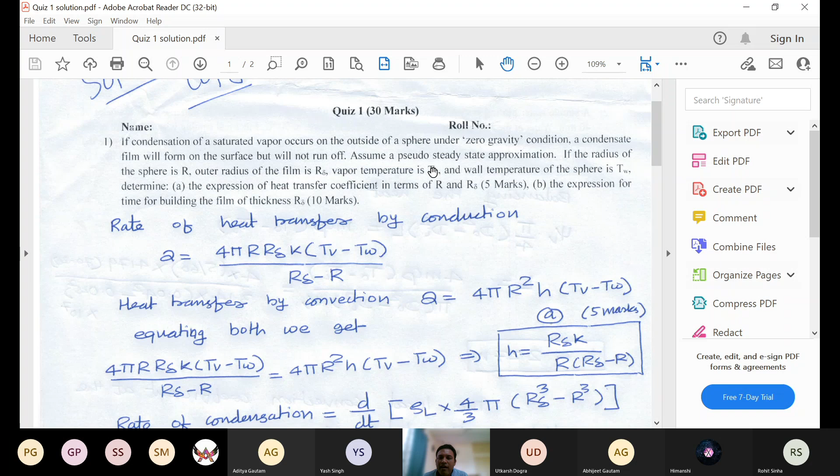Okay, so this was the first question. As I said, the tutorial which we have done, instead of a sphere as given here, the cylinder was given, and that's why L was coming in somewhere, isn't it? But in case of a sphere, there is no L, no length, isn't it? So many people missed that point and just copied the solution of the cylinder as it is without thinking. Please try to go through all the tutorials carefully.

I thought that since these are based on the tutorials, you would find it easy. All right, so what was the first part? First part was we wanted to find out the heat transfer coefficient, isn't it? So for that, we compared the rate of heat transfer obtained using conduction. For conduction, the rate of heat transfer can be directly written like this. This is the same conduction equation we derived for the spherical geometry, isn't it? So that can be given as 4 pi r into r delta k, tv minus tw, divided by r delta minus r, and this we can equate to...

the heat transfer obtained using convection, isn't it? For convection, you can write the equation as HA delta T, isn't it? So A will be for the sphere, 4 pi r square, H into delta T will be TV minus TW. And if you compare these two, what you get is H equals R delta K divided by R into R delta minus R.

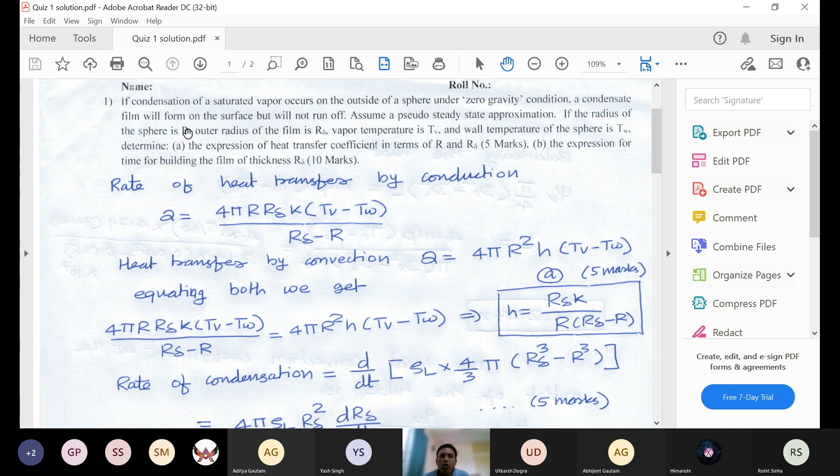That was straightforward. The second part was to find the expression for time t to build the film of thickness R delta. So the rate of condensation can be obtained as d/dt of density of the liquid multiplied by the volume. The volume will be given by 4/3 pi times (R delta cube minus R cube). Many people used R delta square and R square with L multiplied here, which is the equation for cylindrical geometry, not for spherical geometry, isn't it?

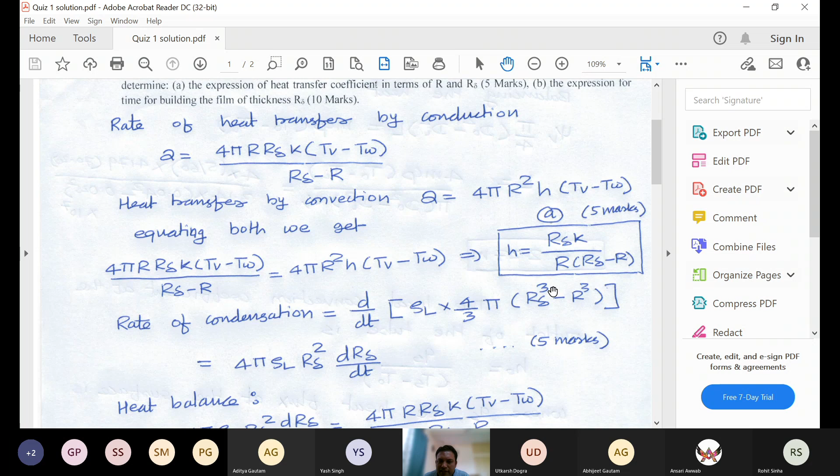So if you differentiate this entire thing, what you get is 4 pi rho L R delta square dr delta by dt, and this is the rate of condensation. But you wanted to find out how much energy will be used for this, isn't it? So you need to multiply this by latent heat of vaporization, LV. Some students have missed this LV multiplication here. So if you multiply LV to this, that will be the rate of heat transfer.

And this rate of heat transfer should be given as rate of heat transfer by conduction. So if you compare these two and rearrange all the terms, you get this integral R delta minus R delta square dr delta by R delta. And if you do the integration, you get T is given as R delta cube by 3 minus R into R delta square by 2 plus R cube by 6, multiplied by LV rho L divided by R K.

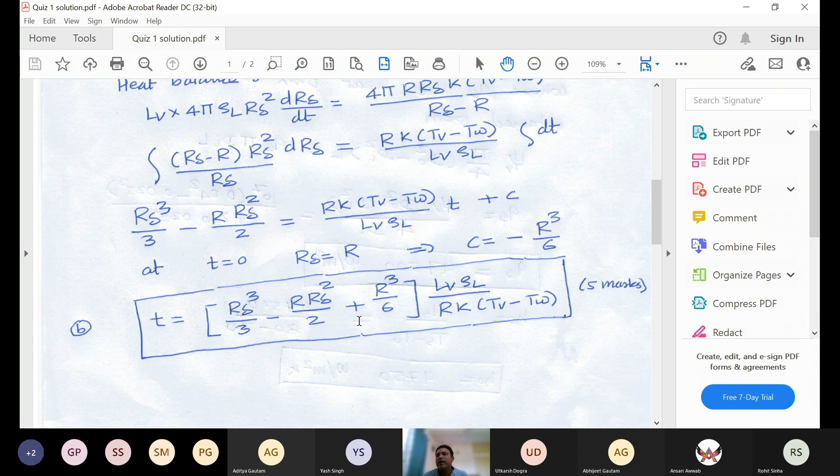TV minus TW, okay, just one step answer, two steps answer, isn't it? It was not difficult, and a similar question was done in the tutorial. So I was expecting many of you to do it correctly. But unfortunately, only few students could do it correctly. So that's not a good sign that students are not going through the tutorials.

Okay, second question. Second question was again very easy, because what is given is: we had a thick walled tube, isn't it? And the thick wall of the tube itself has the electrical current passing through, and that was leading to the dissipation and the generation of heat.

So the amount of heat generated will be given by psi v into pi by 4, basically the volume of this tube, isn't it? So that will be given by D naught square minus di square, L into pi by 4, and this volume multiplied by psi v will give you the amount of heat generated. So this amount of heat generated should be equal to mCp dt, isn't it? So if you compare that, you can directly obtain the L value.

That comes out to be 2.27 meter. Some students have only used pi by 4 d naught square or di square. They have not taken the difference. Remember, the heat is generated only in the thick wall of the pipe, isn't it? So that means you need to find out the volume of that particular thing, and not just the internal diameter or the outer diameter.

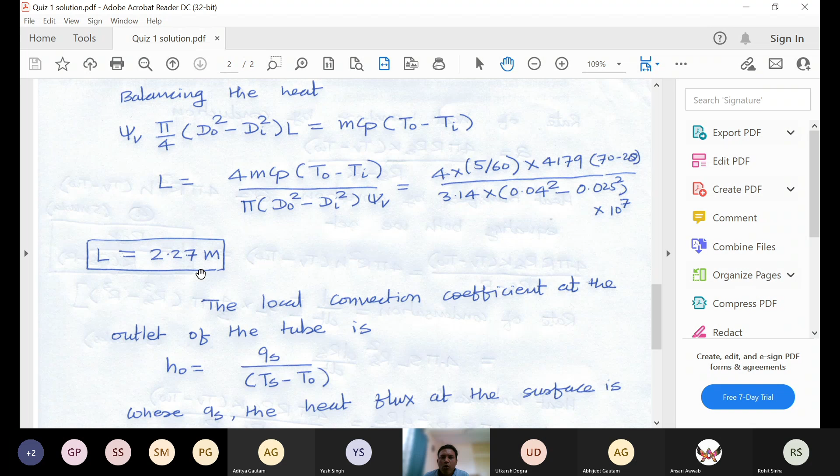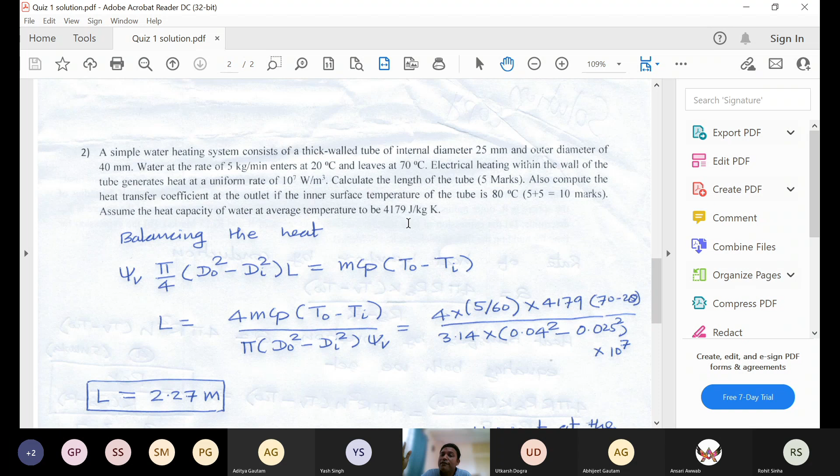Okay, so from this you can obtain L directly. Now what was the question? Question was asking to compute the heat transfer coefficient at the outlet of the inner surface. Inner surface is clearly mentioned. When it is mentioned clearly, the inner surface mentioned means what? You don't need to calculate the overall heat transfer coefficient. You need to calculate the local heat transfer coefficient, isn't it?

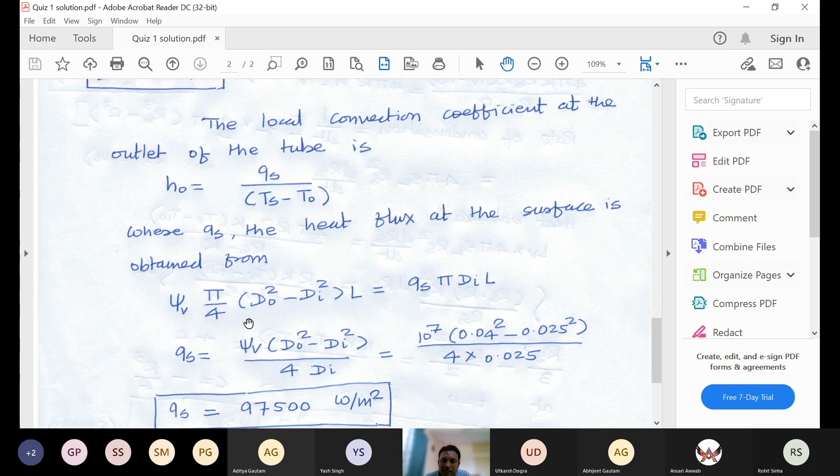So this local heat transfer coefficient will be given by H naught equals Qs divided by Ts minus T naught, isn't it? The wall heat flux Qs will be given by H naught times Ts minus T naught, where T naught is the temperature at the outlet and Ts is the surface temperature. So Qs multiplied by area will give you the total heat transfer, and that total heat transfer you can equate to the actual total heat transfer. So you can use H naught Ts minus T naught into this area as same as the amount of heat transfer, and you can calculate H naught.

H naught comes around 9750. Many people have used the LMTD here. In the question, it is clearly mentioned that the heat transfer coefficient at the outlet of the inner surface, so that is not the capital U. It is just the H at the outlet that is being asked in the question.

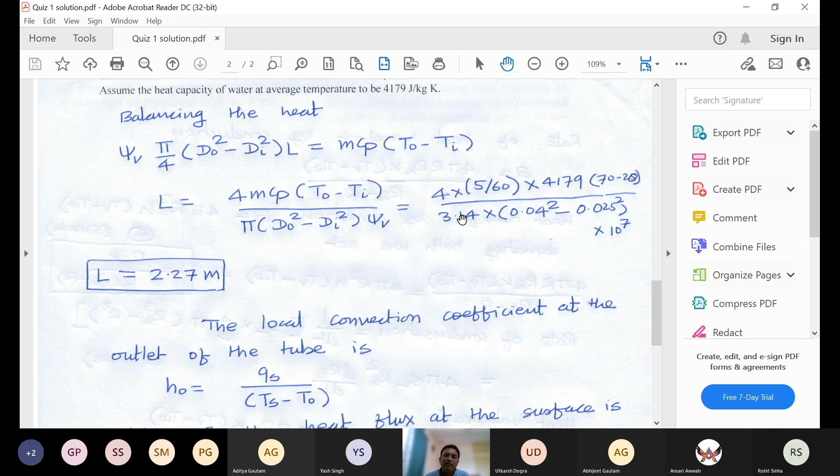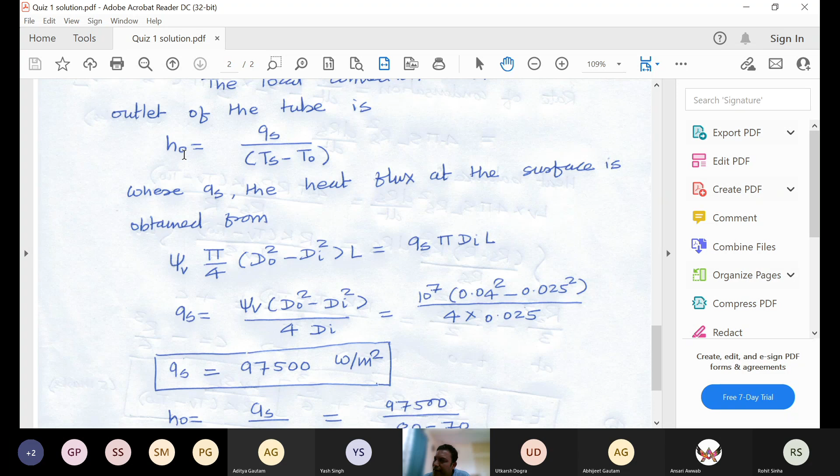Okay, so again this was straightforward, even though I have shown two steps here, it could have been done in a single step. This total amount of heat transfer here should be given as H naught, Ts minus T naught, into pi Di L. That's it. Why Di L? Because inner surface is mentioned, that's why inner surface area has to be multiplied, isn't it? And you can calculate this H naught directly. This H naught is given for the outlet. You could have calculated directly H naught as this. Is it clear to everyone?

So both the questions were extremely simple. I have specifically designed them as simple so that many of you, since you are coming for the first time for an offline quiz, you should get some help.

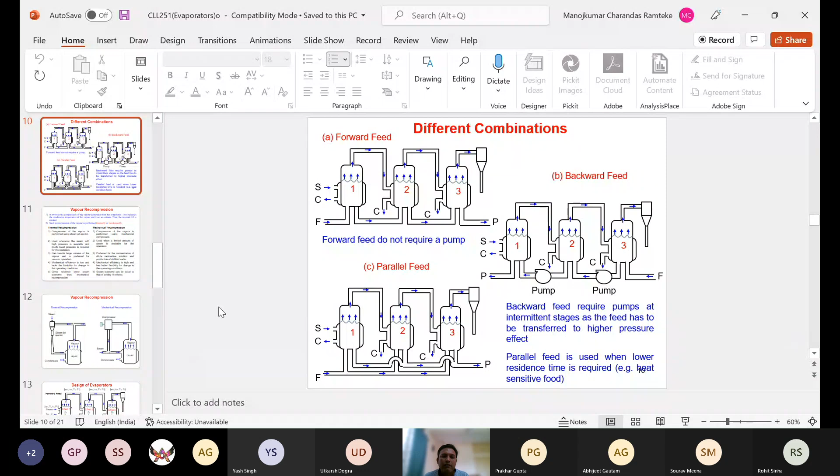Yes, sir. Okay, so remember how we started our journey in this course. We started with the concept of 3 modes of heat transfer, then conduction, then convection. In convection, we looked at heat transfer coefficient, forced convection, and natural convection. After that we looked at condensation and boiling, then radiation, and after that heat transfer equipments.

The last bit remaining in this course is evaporation. Why evaporation? Because you are all process engineers. If you were a mechanical engineer, you wouldn't have done this evaporation, boiling, and condensation. But for a process engineer, evaporation is extremely important, because if you are working in a process industry, this is what you are going to do.

Evaporation is commonly used in the food processing industry. You see several products like tomato ketchup, chocolate production, beverages, different liquid beverages, production of salt, sugar, etc., even milk products. In all these process applications you will see evaporation, which is extremely important. Being a process engineer, a chemical or biochemical engineer, you will mostly be looking at this type of operation in the industry. That is why evaporation is extremely important.

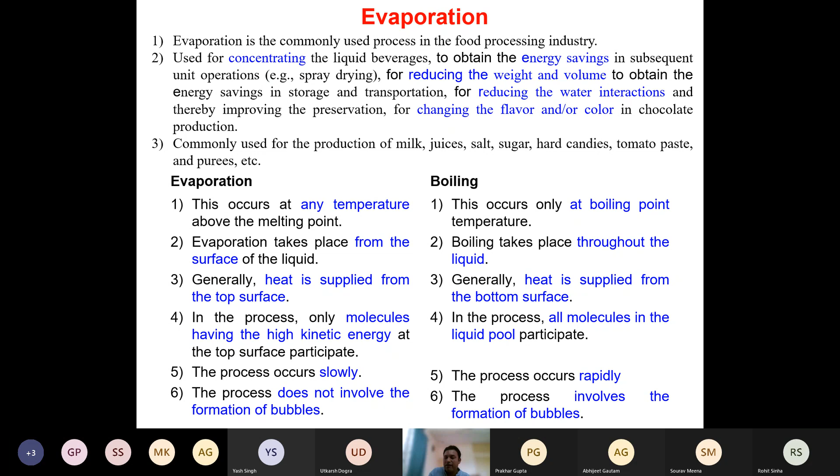Another concept you already know: what is vapor pressure? Typically, if you look at a liquid, you will see that the molecules present at the top surface are bounded only by the layer of molecules at the bottom. There is no bound at the top, these molecules are not bounded at the top.

But if you look at the other liquid molecules present inside the liquid, these are bounded by a top layer as well as a bottom layer, both. You can see that the molecules at the top layer, at the surface of the liquid, are moving in a zigzag manner because of their kinetic energy. At some time their kinetic energy overcomes the energy barrier required, and because of that these molecules escape from the liquid surface. That's what happens in evaporation.

Since these molecules keep on escaping from the top surface, eventually they build a pressure in the vapor space, and this vapor pressure in the vapor space acts on the liquid surface itself. This pressure is called vapor pressure. So the back pressure exerted by the vapor on the liquid surface is called vapor pressure.

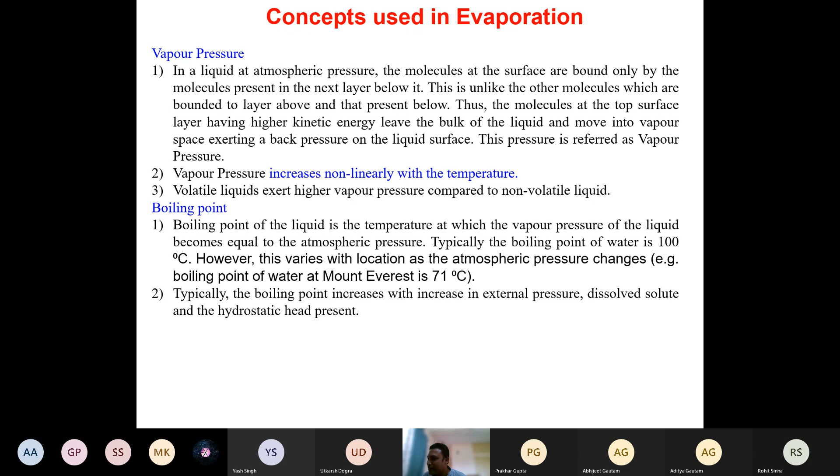How does it decrease with vacuum? What is the boiling point of water at Mount Everest? It's 71 degrees Celsius. Why not 100? Because the pressure at Mount Everest is low, isn't it? So if you lower the pressure and create a vacuum, the boiling point will decrease further. That decrease in boiling point leads to an increase in the difference between TS minus TB. Correct? So your driving force increases by creating a vacuum.

Again, separators are required because whatever vapor comes out from the evaporator needs to be condensed, and this condensed liquid has to be separated from the non-condensing gas. So a separator is used. Is it clear to everyone, at least whatever required equipment is there? We will see the pictorial representation of the evaporator that will clear the concepts further. But is it clear whatever we are saying so far?

Yes, sir. Okay, so these are the different types of evaporators. Let's look at the first one, the batch type evaporator. In the batch type evaporator, there is a liquid pool that we are trying to concentrate. The higher the temperature of this liquid, the higher the vapor formation, and therefore the faster the concentration process. Do you agree?

If I increase the temperature of this liquid present here in the pool, higher will be the vapor formation, isn't it? Evaporation increases with the increase in the temperature of the liquid. Do you agree with me? Yes, sir.

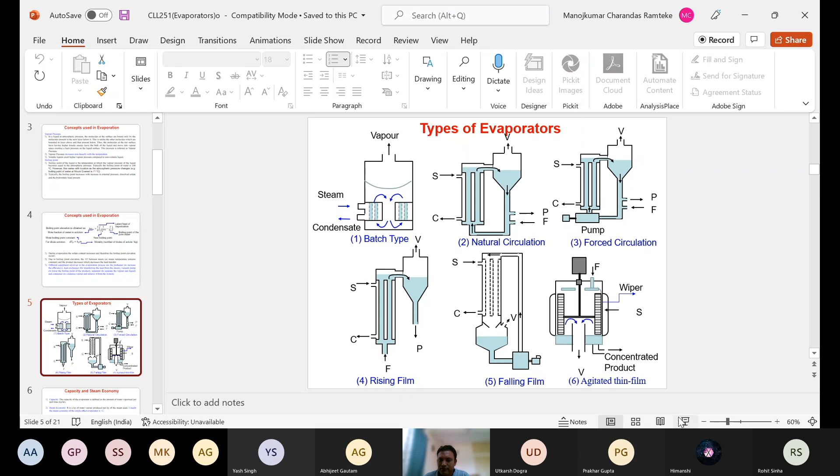So this agitated thin film is done. Now let's define some of the terms in the evaporator. First important term is the capacity. Capacity of the evaporator is defined as the amount of water vaporized per unit time in the evaporator.

There is another interesting term which is called steam economy. Remember, as I said, in the evaporation process you supply heat using steam, isn't it? And because of that the vapor gets formed over the liquid or solution, isn't it? So the amount of water vapor produced, typically the solution involves water, per kg of steam used is called steam economy. Is it clear? This is a very interesting term.

Both these terms are very important. Capacity is the amount of water vaporized per hour, per unit time. But amount of water vaporized per kg of steam used is steam economy. The kg of water vaporized per kg of steam used is called steam economy. Usually the steam economy of a single effect evaporator is less than 1, or approaching 1. Is it clear?

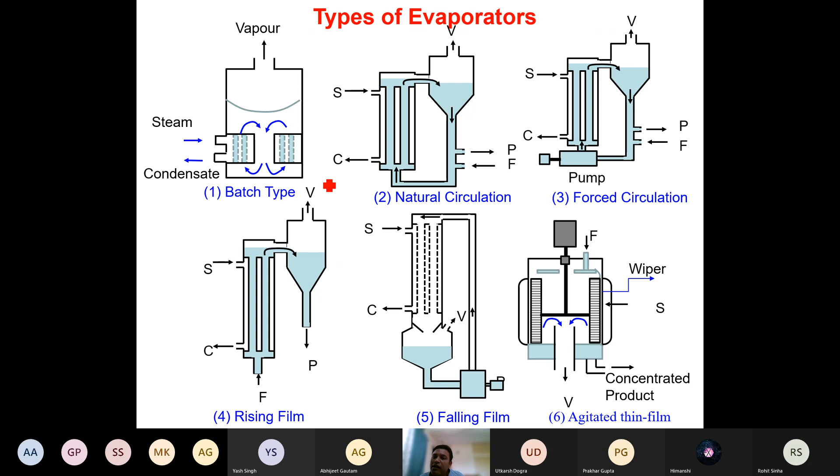But the most commonly used way for increasing steam economy is by using the multiple effect evaporator. Here we have used only one evaporator, but let's say if I use such evaporators in series - I use this natural circulation evaporator in series, so one unit is this. Again, the product coming out from this is used as feed to the next evaporator, and the product coming from that is used as feed to the third one. So multiple such concatenated individual units can be used in multiple effect evaporators. Is it clear to everyone what I'm trying to say?

Is it clear? Yes, sir. So by using multiple effect evaporators, we can improve the steam economy significantly. It can go beyond one, it can easily go beyond one.

The other methodology for improving steam economy is vapor recompression, and this is very important. What does vapor recompression do? Whatever vapor comes out from one effect is compressed using a compressor. Once you compress the vapor, what happens to it? When you compress the vapor, its boiling point increases and its enthalpy increases. This compressed vapor then acts as steam to the next effect.

So vapor recompression is a very important methodology for improving steam economy. Why? Because this is the method used in nuclear reactors. If some of you join the DAE, Department of Atomic Energy, this is what you will use there. The rationale behind using vapor recompression is that it does not increase the volume of the fluid used - that is a very important statement. Why? Because in a nuclear reactor, whatever solvents you use usually have radioactive material. If you increase the volume of this radioactive material, you will require additional money to discard it.

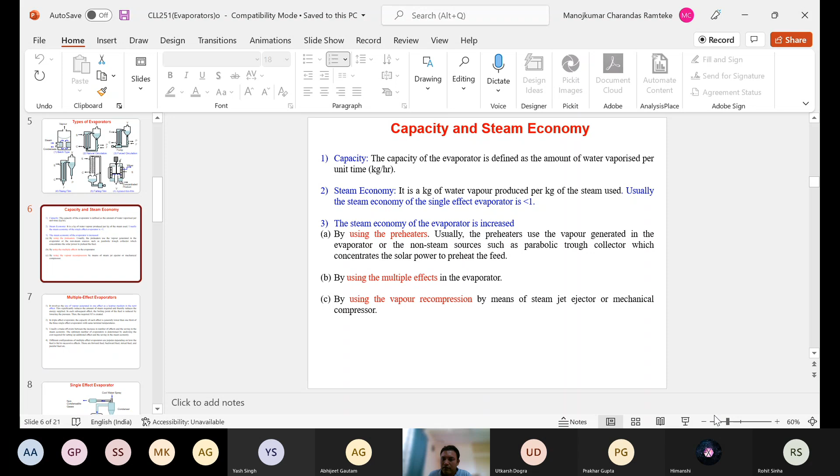So let's look at each of these in a little bit more detail so that you will appreciate what I'm trying to say. Is my slides visible or I lost you? Visible. Okay.

So one of the commonly used methods for improving the steam economy. What is steam economy? The kg of vapor produced per kg of steam used - that can go beyond one by using multiple effect evaporator or by using vapor recompression. So let's look at multiple effect evaporator first and then we will look at vapor recompression. Both these methods are extremely popular in the industry.

In fact, one of the lab experiments is on multiple effect evaporator. So 3 effect evaporator you will be looking at in your CLP 303 or 305 in the next semester, so that you will practically see in the lab. So in multiple effect evaporator, what we do is use multiple single effect evaporators one after another in a series to improve the steam economy.

So it involves the use of vapor generated in one effect as a heating medium in the next effect. That is what I said, isn't it? So vapor generated in the first effect is used as steam for the next effect, and this vapor generated in the next effect is used as steam for the further downstream effect.

This significantly reduces the amount of steam, because now you are using steam only in the first effect. You are not using steam in the second or third effect. In the second and third effect, the vapor generated from the previous effect is used as steam. So no additional steam is used in the second and third effects, and because of that, the amount of steam consumed decreases significantly compared to the amount of water evaporated. Is it clear to everyone?

Is my slides visible? Hello? Hello? Yes, sir, visible. Okay, all right.

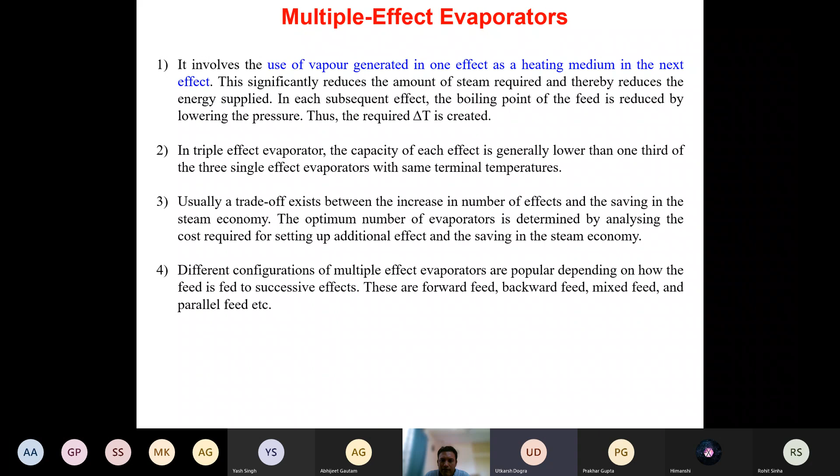This feed is heated using steam. Typically at 1 atmospheric pressure, the boiling point here is nearly 100 degrees Celsius. But the vapor coming out from this first effect then acts as steam to the next effect. So in order to have this vapor act as steam to the next effect, the boiling temperature in the next effect should be lowered.

So the product coming out from the first effect then acts as feed here in the second effect. Again, the vapor generated in the second effect is used as steam to the third effect. Condensate comes out here. The product coming out from the second effect is used as feed to the third effect.

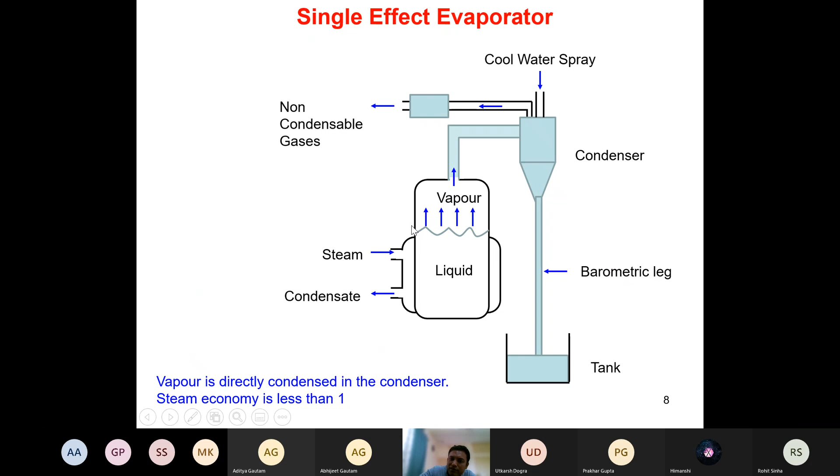So pressure is subsequently reduced in each of these effects to facilitate evaporation. The steam is originally used only in the first effect itself; subsequent effects use the vapor. So the amount of steam used is much lower compared to using a single effect evaporator, so the steam economy is usually greater than 1.

Is it clear to everyone? Hello? Is it clear to everyone?

Now, as I said, there are multiple combinations of the feed. This is the forward feed. Here you can see the feed entering the first effect, and the product coming out from the first effect is used as feed to the next effect. Then the product coming from the second effect is used as feed to the third effect. In this case, we do not require a pump, because all subsequent effects have lower pressure. Whatever pressure I have here, the pressure in effect 2 is lower, and the pressure in effect 3 is lower than both 1 and 2. So the product coming from the first effect is sucked directly into the second effect, and we do not require a pump. This is the forward feed.

But let's say I use the feed in the reverse direction. For instance, if I feed the third effect while the vapor is moving in its normal direction, the vapor generated from the first effect is used as steam in the second, vapor generated in the second is used as steam in the third, and in the first effect only pure steam is used for heating. In this case, the feed enters directly into the third effect, and the product from the third effect is then used as feed to the second effect. The product from the third effect has to move to the second effect, which is at higher pressure, since the third effect is at lower pressure. So we have to transfer the product from the third effect to the second effect, which is at higher pressure, and clearly we require a pump here.

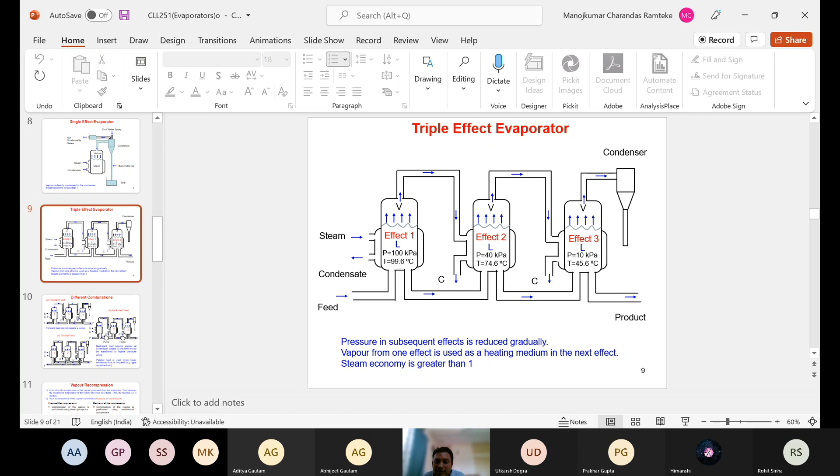Since the pressure is getting lowered, in a forward feed it doesn't matter, because the lower pressure is already downstream, so the product from the first effect is sucked into the second effect, and the product from the second is sucked into the third automatically, without any pump. But in a backward feed, the feed moves in the reverse direction compared to the vapor. The feed enters the third stage instead of the first stage, as it would in a forward feed, where the feed enters the first effect. In the backward feed of a triple effect evaporator, the feed enters the third stage. So the product coming from there will be at lower pressure, but the pressure inside the second effect is higher, so if I have to transfer the feed from lower pressure to higher pressure, I have to pump it. In the forward feed it will be automatically sucked in, but in the backward feed you have to pump it.

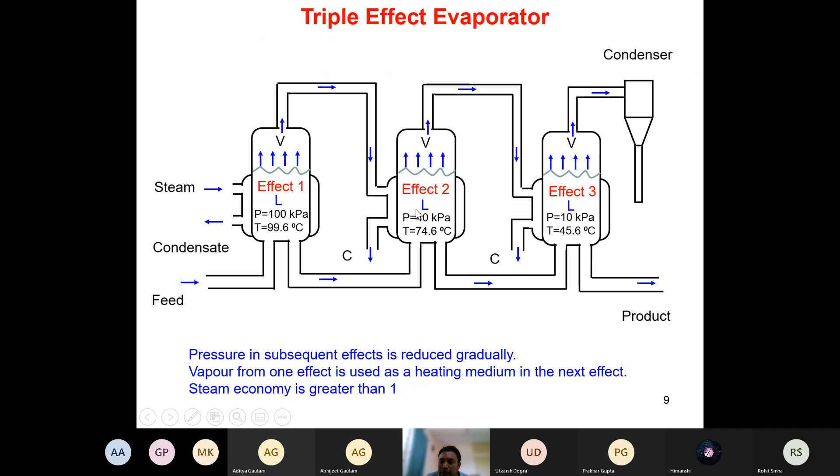So instead of creating a vacuum and reducing the boiling point of the liquid, we are increasing the enthalpy or boiling point of the vapor itself, which is acting as steam. So instead of reducing the pressure here, we can use the same feed, but the compressed vapor acts as steam. So we do not require lowering the temperature or pressure in the subsequent stages. This methodology is called vapor recompression.

Such recompression of the vapor is performed thermally or mechanically. So there are two recompression methods: thermal and mechanical.

In thermal recompression, let's say in a plant you are having very high pressure steam available for some other operation, but for a particular operation you require lower pressure steam. So this high pressure steam is used in a steam jet ejector to lower its pressure, compressing the vapor directly, and that compressed vapor is then used as steam to the next effect.

Compression of the vapor is performed using a steam jet ejector. In mechanical recompression, the compression of vapor is performed using a mechanical compressor. So there is a difference. Here the high pressure steam is already present for some other operation, and that high pressure steam is used via a steam jet ejector to compress the vapor.

This is used whenever steam with high pressure is available and much lower pressure is required for the operation. Mechanical recompression is used when limited amount of steam is available. Thermal recompression can handle a large volume of vapor and is preferred for vacuum operation, whereas mechanical recompression is used for concentration of dilute radioactive solutions and production of distilled water.

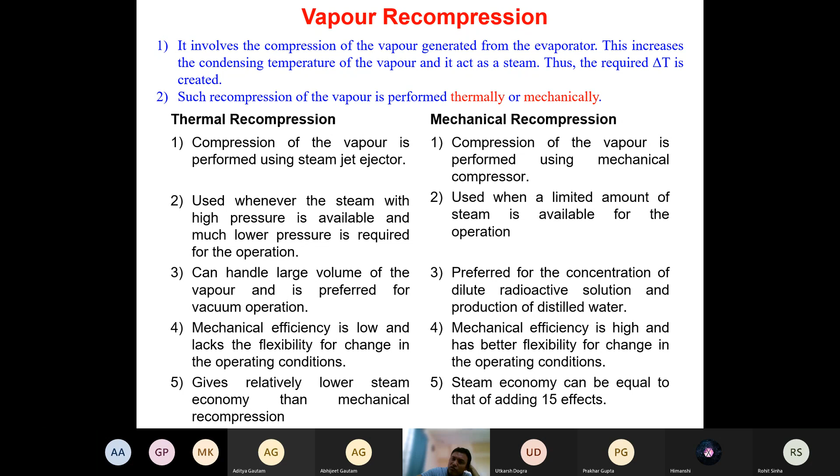So what is happening in thermal recompression? Steam with higher pressure is available. If you are having higher pressure steam available with you, you don't use it directly for heating. Instead, the vapor generated from the evaporator is mixed with the steam in a steam jet ejector, and because of that you get a lower pressure steam, which you use as the condensing medium. Thermal recompression uses the steam jet ejector. High pressure steam is converted to lower pressure steam using a throttling process, shown here in the steam jet ejector.

So whatever vapor is generated here gets compressed slightly using the high pressure steam. This is called thermal recompression. You do not have much flexibility in this particular operation.

But if the vapor generated from the evaporator is compressed using an external compressor, and only a small amount of makeup steam is added in this entire operation, whatever the compressed vapor is, that itself is used as steam. Only a small amount of makeup steam is used in addition, for heating the liquid.

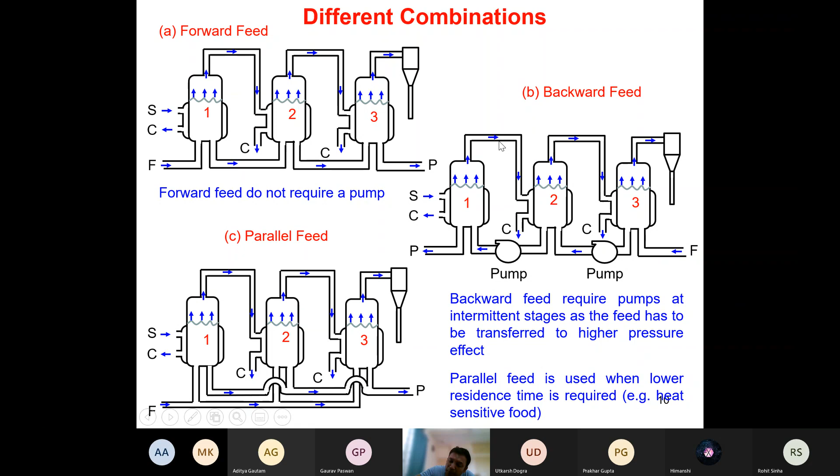The overall performance will be equivalent to the multiple effect, but you require only one single unit - you do not require multiple units. So that is the advantage. Can you see the point in vapor recompression? In a multiple effect evaporator, multiple units are added. In a vapor recompression, you are not adding multiple effects, but creating that effect by compressing the vapor coming out from the evaporator itself. This vapor is used as steam, but by compressing it, you create the equivalent impact of the multiple effect evaporator. Is it clear?

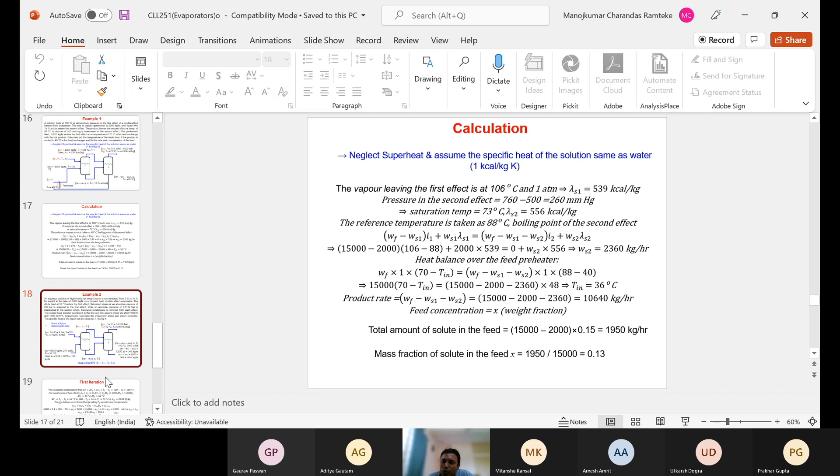Maybe, okay. Is it possible to have an extra class today in the afternoon or maybe tomorrow? I think this is a very important concept, but okay, maybe we stop here and we will continue this entire thing again on Thursday. Only one slide is there. After that, 2 examples are there, but these are very important things, and I am really reluctant to do it in a hurry because I think.

Are you all able to get it what I'm saying, or we are lost? Okay, maybe let's stop here. We will continue with these concepts again on the Thursday class, but then we need one more lecture for the tutorials. So can we have one extra class maybe on Wednesday or Tuesday for tutorials?

We will do the tutorials. We will not do the regular class on that. Is it possible? Yes, sir. When can we have an extra tutorial class? Sir, when it is scheduled, we have decided, Wednesday. Wednesday we will have one, but in addition to that, I'm saying. Sir, you can extend that, I think. Yes, sir. Okay, maybe let me just complete this, and we can do a regular class on Thursday. We will do a recap of everything again. Is that okay? Because I think these concepts are very interesting, and I think we are already 2 hours almost.

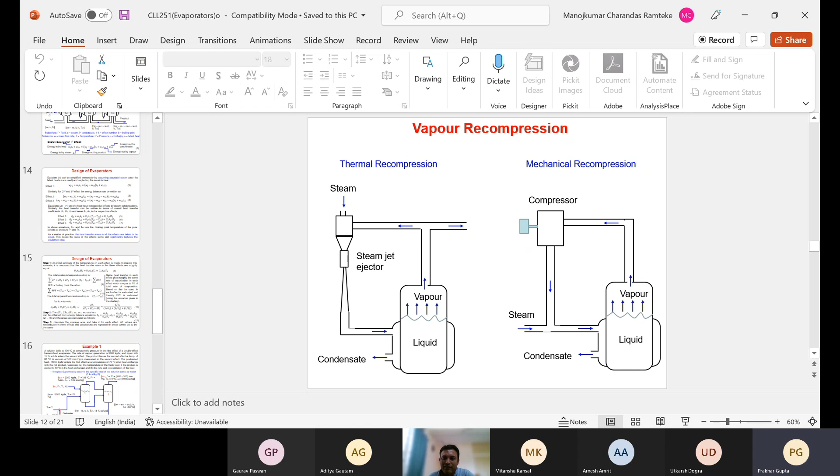Sir, one thing, could you repeat the last slide which you explained? Okay. I wanted to ask why we are considering area to be equal and then putting it again in the equation.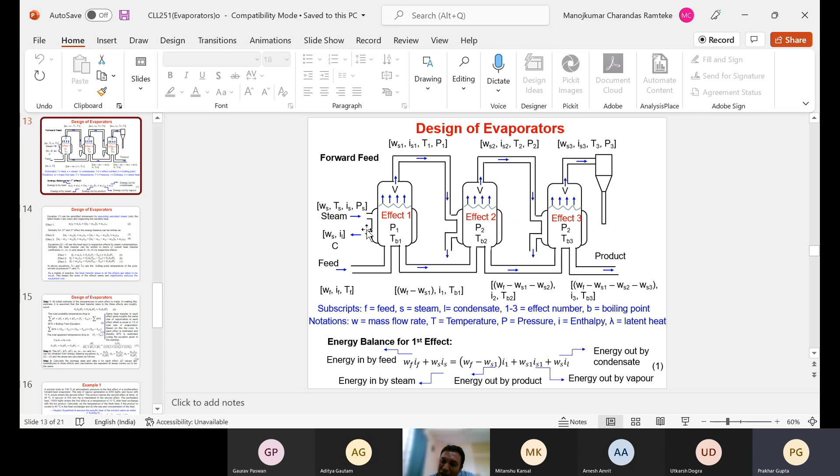The rationale behind using the area to be equal is because in general we design the same unit. We do not design a different size unit. We design a same size unit and use them repeatedly in multiple effects. So the size of effect 1, effect 2, and effect 3 are all same, and heat transfer is taking place at this jacket itself. If the size of all 3 effects are same, what will be the heat transfer area? Equal. That is the reason why we are using equal areas.

So here what we are doing is there are 3 steps involved in this design process. What we are assuming is, we have to start with some assumption in order to design. So to start the calculation, we are assuming initially that the rate of heat transfer is same. That's a reasonable assumption because the size of all my units are same, isn't it? Of course the rate of heat transfer will not be exactly same because the temperatures are different, but that's a valid assumption to start with.

So because we assume the rate of heat transfer is same, U1 A1 delta T1, U2 A2 delta T2, U3 A3 delta T3 are all same. And since the areas are going to be same because these are same size units, A1, A2, A3 are all same. Based on this, U1, U2, U3 we know. By knowing U1, U2, U3, and also knowing the terminal temperatures - for instance the temperature of the steam here, and the outlet temperature of the feed - if we know the terminal temperatures, or any 2 temperatures, we can find out delta T1, delta T2 and delta T3 from these 3 equations.

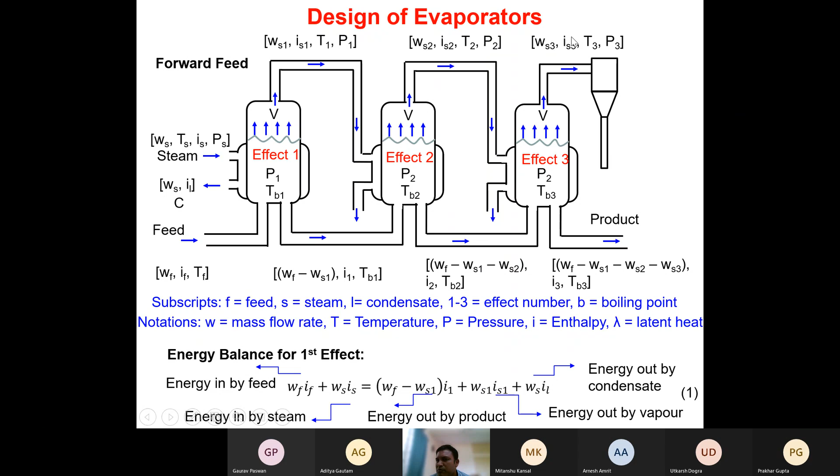So once I know these temperatures, I can go back and find out what will be the enthalpy from the charts given at the back of the book. Once I know the enthalpies, in this case, instead of enthalpies, I will have the lambda, the latent heat of vaporization. So latent heat of vaporization for saturated steam for a given temperature, I can find out from the tables given at the back of the book. Once I know that, I can put those in these equations. And then I can calculate the individual values of WS, WS1 and WS2.

Once I know WS, WS1, WS2, I can back calculate the areas. So remember, we started with the hypothesis that A1, A2, A3 should be same, but now we are getting different values of A1, A2, A3. That means this temperature difference delta T1, delta T2, delta T3 is not correct. Terminal temperatures are okay, but the individual distribution in delta T1, delta T2, delta T3 is not correct. So we can redistribute these individual temperatures, and by redistributing them, again we go ahead for the next iteration. In the next iteration, again we calculate A1, A2, A3. If A1, A2, A3 are not same, we will again redistribute the temperatures, and continue this cycle till our areas come out to be nearly the same. That's how the design procedure is used.

Again, in this entire calculation, delta T1, delta T2, delta T3 should be equal to Ts minus TW3 minus boiling point elevation. So this calculation of boiling point elevation becomes very important whenever I am having a concentrated solution. But when I am having a dilute solution, this I can neglect. But if I am having a concentrated solution, in that case, this boiling point elevation can also be roughly calculated. We can assume that the amount of evaporation, total evaporation, and one-third of that will be taking place in each of these effects.

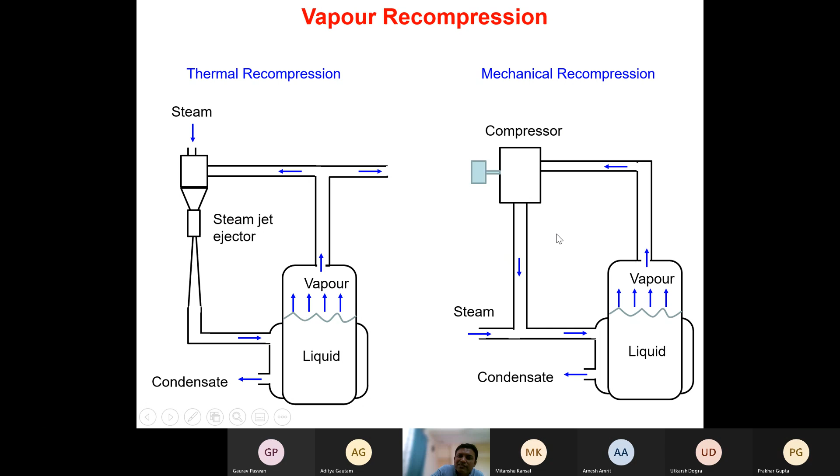With this, we can calculate the concentration present in each effect. Once we know the concentration of the solute present in each effect, we can use this equation and calculate the boiling point elevation. And that boiling point elevation one can use in this equation. So that procedure becomes slightly more tedious when the boiling point elevation cannot be neglected. But very often when we are only concentrating the dilute solution, this summation of boiling point elevation we can neglect.

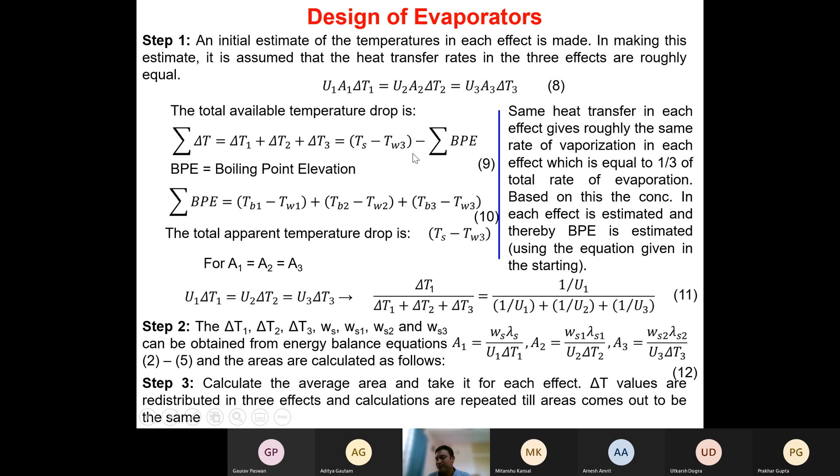Is it clear to everyone? So you will appreciate all this concept when you look at the solution of the problems. Once we look at the solution of these problems, then you will appreciate the concepts.